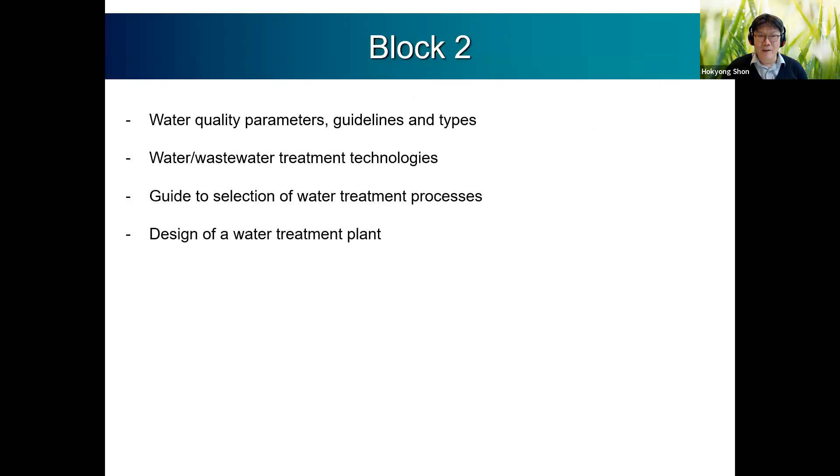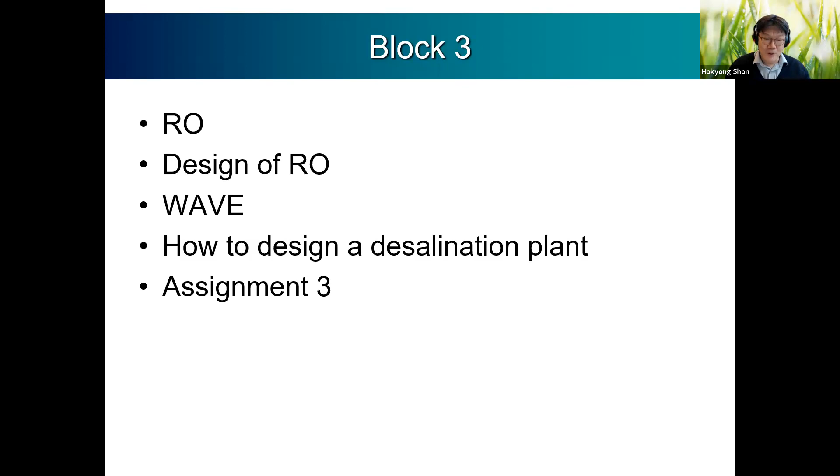So how to design your seawater desalination plant from intake, pre-treatment, reverse osmosis, and post-treatment. What's the design parameter? Also, we have used the software, the WAVE program. You are already familiar with how it can complete your design of the reverse osmosis process. So that's all about block 1, block 2 and block 3. I'm sure you are very confident to design your wastewater and seawater desalination plant, including the community engagement. That's very much necessary when you consider your plant design as well as the consultation. So that's our general information today.

Do you have any other questions on the contents of 42991 or assignment 3? We can start to discuss your questions. Any questions? Yes, Professor, I do. For the WAVE software, I'm a bit confused, because when I put in all the information and press on the report, it's still telling me there's something wrong and it cannot perform the calculations. I don't know why it's giving this error.

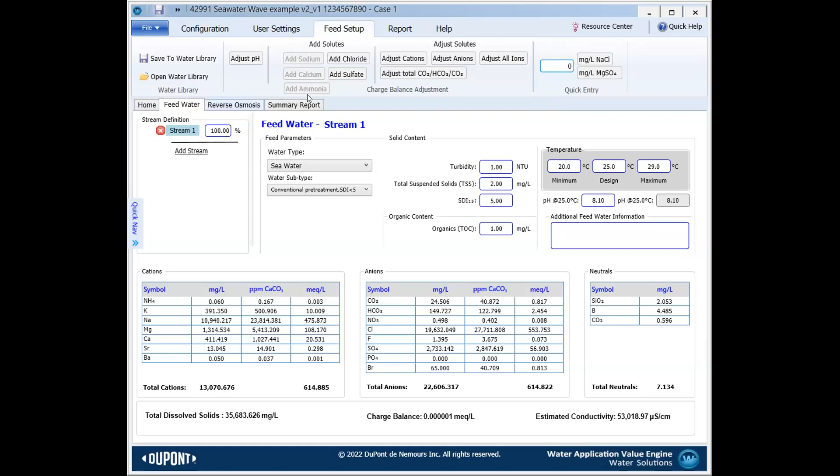All right. Can you please share your design so we can have a look together? Yes, one second, please. Can you see the screen? Yes, I can see that. Okay. This is the feed water, and this is the reverse osmosis. Okay, just a second. Can you click pass 1? Sure. 43%. 1459. All right.

Should I press the summary report? Yes, please. So this is based on your design, right? Did you utilize the example file which I gave you? Yes, modifications have been done to the file that you sent. But I also have another model I've done from scratch. This one is not giving any calculations. I have not tried getting the report for the first one.

I see. So your design has a very, very large quantity of feed water, and in your calculation of the pressure vessels and maybe your first pass, something is wrong. That's the reason why. Okay, did I give you the file last time? The seawater quality. Let me show you.

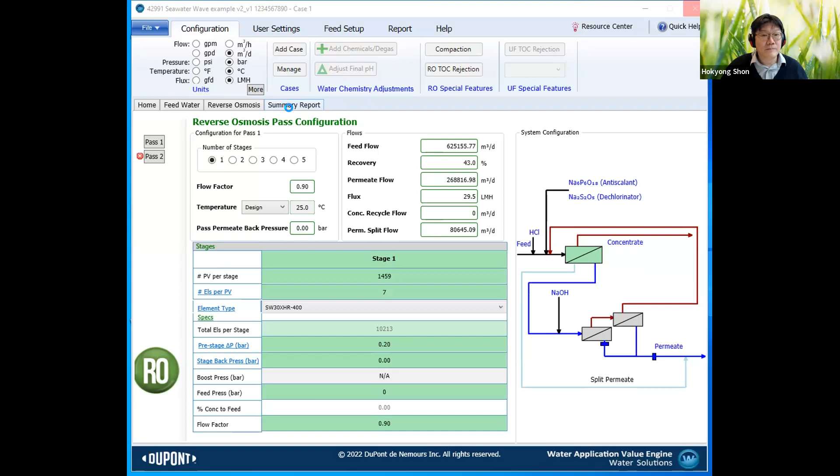Professor, can I add something? Yes, sure. So I had this same problem as Olena when I first did mine, because the feed water and the flux was running way too high for the parameters. I ended up breaking it down into smaller feed flow, like 10,000 cubic meters per day, and then having more treatment trains to allow the calculation.

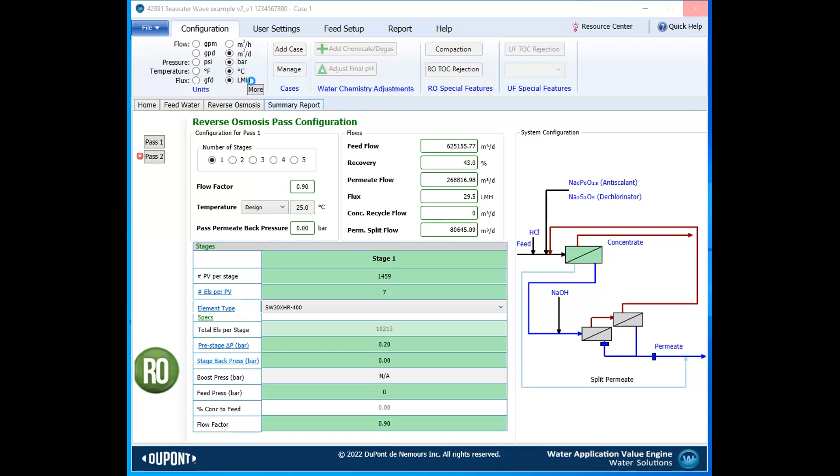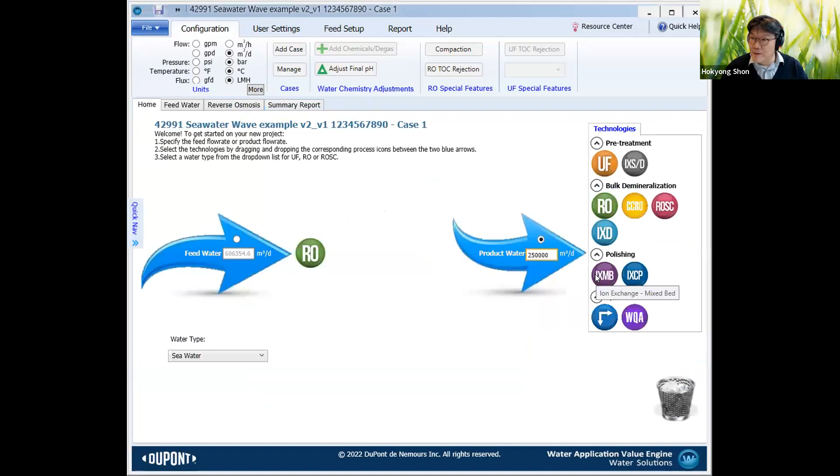Is that something you agree with? I think so. Can you show your feed water? Yeah, you failed to converge. So review your design, because your design flow rate is not good. That's the reason why it looks like something is wrong with the design factor.

And also I have a question on the pressure vessel and element calculation. I was wondering if you could give us an example, because every time I input the calculated pressure vessels from the formula, the WAVE program tells me that there's not enough elements, or the flow is too high, so I have to increase the elements to make the program work. Okay, so let's finish first.

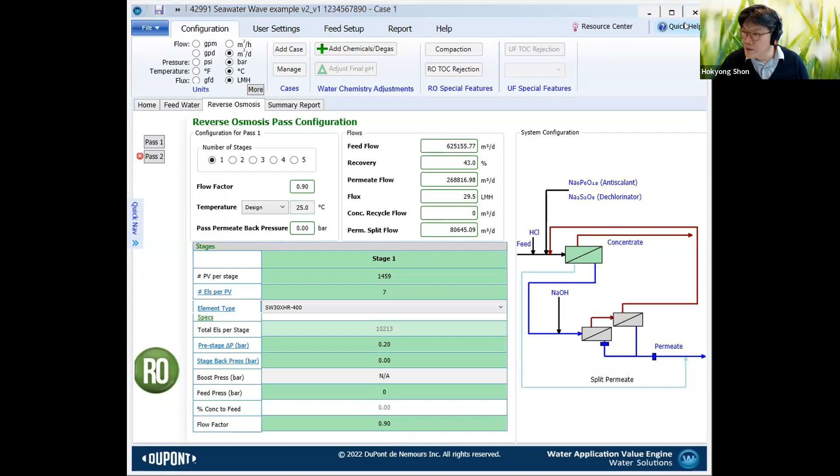First, Olena's problem. Olena, I have sent you one file through this chat box. Can you see the chat box? Let me finish the Olena one. Can you download this file? Yes, I'm doing this now. Please open your file. I think it looks a little bit different from your design. Can you open this file in your software? So what I feel, your pressure vessel is a little bit lower, as well as elements, compared to this example. So something is not flowing in yours. You can exit WAVE, yes.

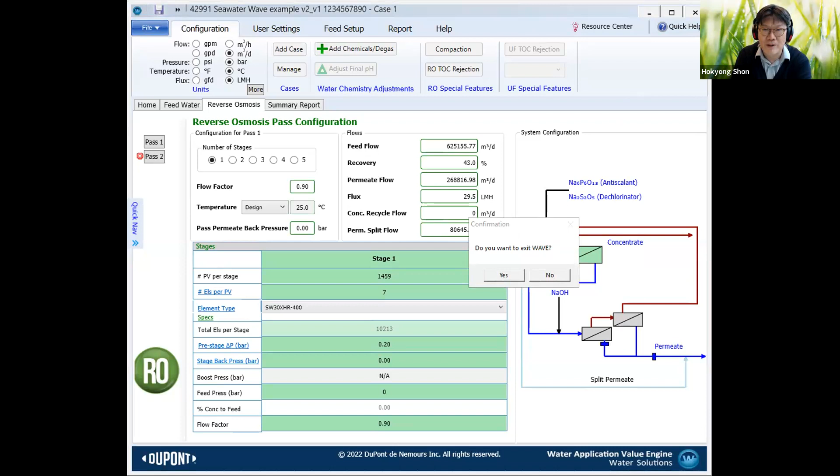Also, Professor, quick question. If the pH is 8.1, then we should add an acid to reduce the pH, right? Right, that's correct.

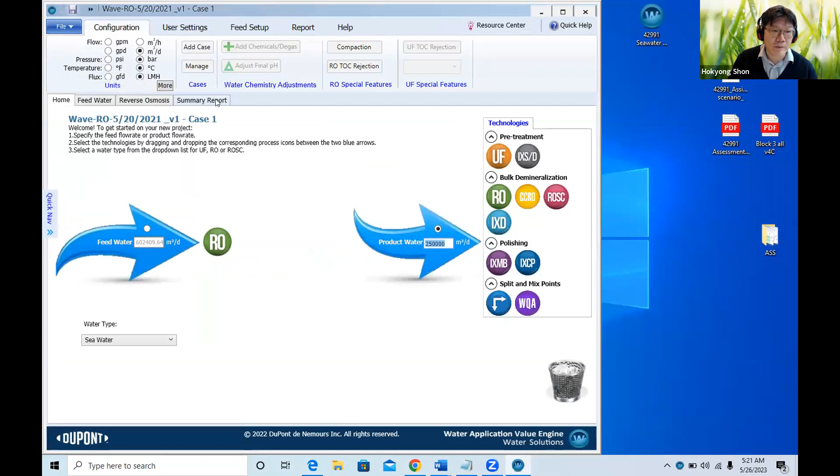So you are now opening the file, right? Yes. I don't think it's working. Can you download the file? Yes, I did. Download and then open it. It's downloaded. Can you open it? Yes, it worked. Okay, so compared to your design, can you click the summary report now? You have to wait. Can you click the summary report? Yes. So this should work.

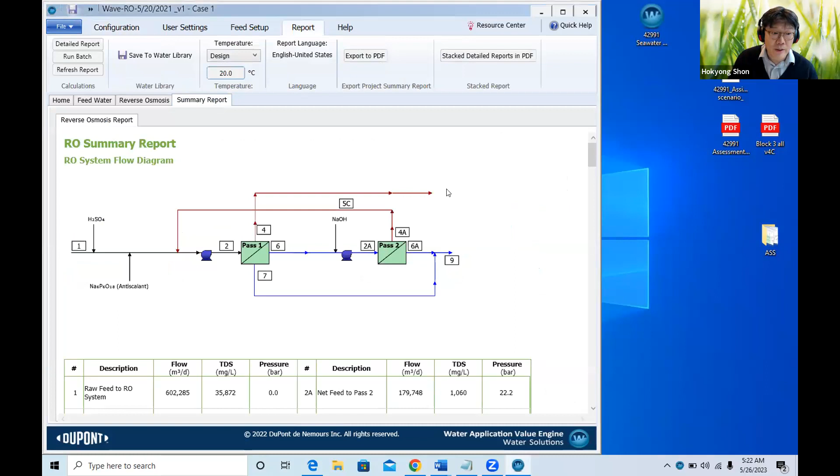And what's the difference from your design? Looks like you have fewer elements, fewer pressure vessels. Now it looks okay, right? Can you go to design warnings? Go down. Can you go up? Yes, you can see error and design warnings: none. When you have no warnings, it means this is well designed.

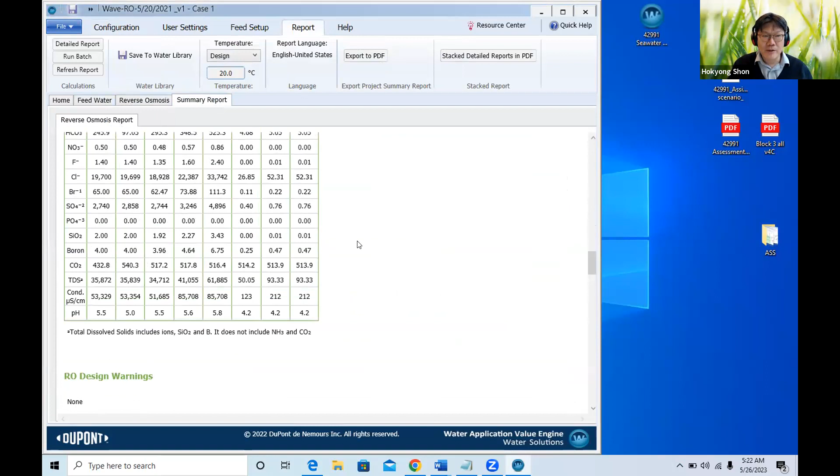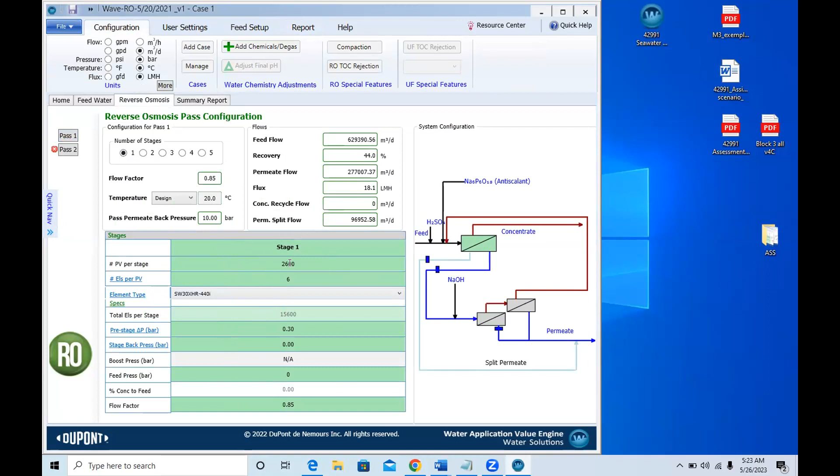Can you click reverse osmosis now? Can you go to pass one? So you can compare your pass one, pass two. It used to be 1,400 something in your pressure vessels, right? Now you have 2,600. So in fact, you designed very few pressure vessel elements, so your water flow balance is not good and this cannot be calculated in your report. You designed a very huge amount of feed water and fewer pressure vessel elements, so there are a lot of errors and you cannot get any report.

So you can start with this one. If you want to use your design, you should reduce your overall feed water. 2,600 versus 1,400, almost 2 times. You need less initial feed water to complete your design. Do you understand me? Yes. So you can make a nice summary report. The current system is working well, and this can be your starting point to design your process. And you can also see pass two. Click pass two.

So you can see the stage one, stage two. So how many pressure vessel elements do you incorporate? That's one of the most important factors. You can try to create the design warning or no design warning, because if the flow rate doesn't really balance well, you cannot see any summary report. So you can start from this report example, and then you can finalize your report assignment.

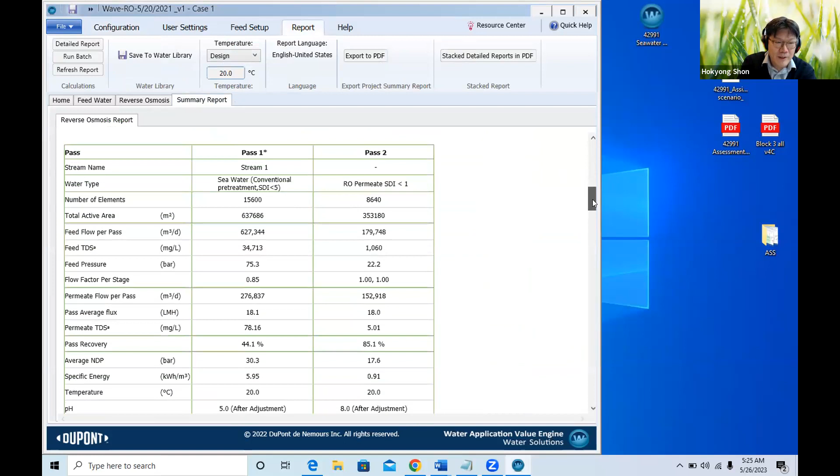Okay, Professor. And do we need to add something for pH adjustment in first pass and second pass? Okay, so it depends on your summary report. Can you go to the summary report again? Yeah. And you will see the scaling potential in your report. So you have to look carefully at your report, at what information you can get. So I can show you. Can you go down? More, more. Yes, here you can see errors, chemical adjustment.

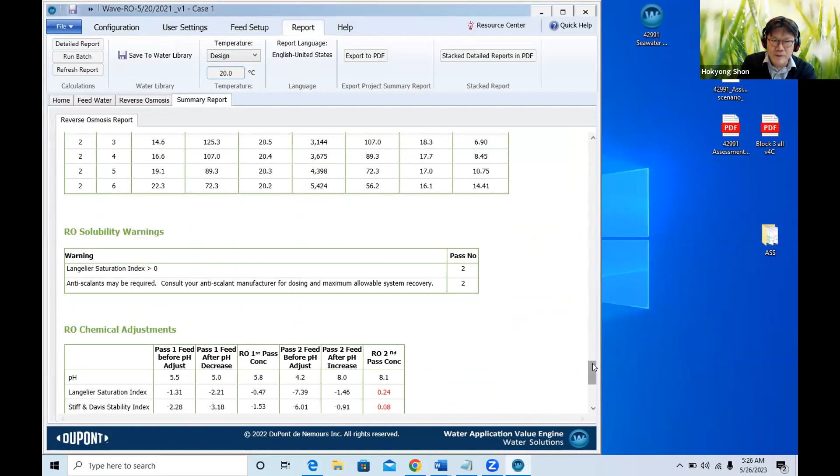So when you have a red color, it means you have warnings. If you see the error, solubility warnings, the Langelier saturation index LSI value is more than 0, which means you have a positive value, which means there is very strong inorganic scaling potential, mostly calcium carbonate or calcium phosphate sulfate. So your pass 2 will have a very strong potential. That's why it shows the warning, right? Anti-scalant may be required. Consult your anti-scalant manufacturer for dosing and maximum allowable system recovery in pass 2. So the red color shows the warning of the design for potential inorganic scaling.

So based on this information, you go back to chemical, you can reduce the pH some more, and then you can add your anti-scalant, and then you can resolve this kind of potential inorganic scaling. So you are correct. You have to put your chemical anti-scalant based on this report. So the anti-scalant also affects. Right, anti-scalant will affect your pass 2. So you can go to reverse osmosis.

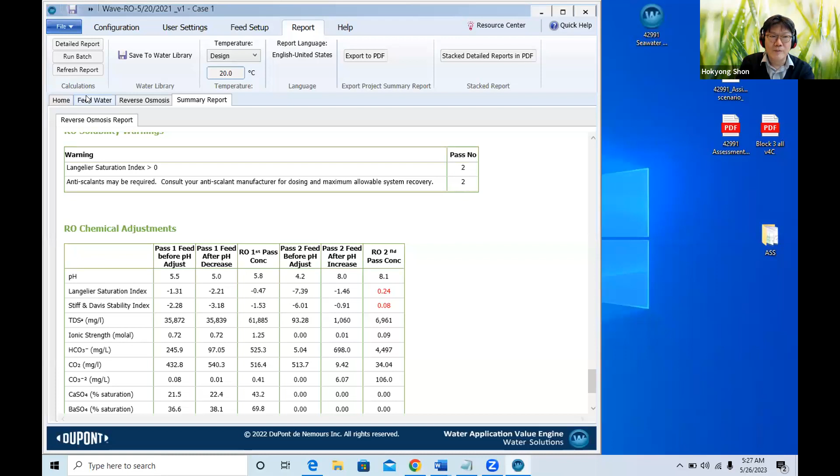So can you click the feed water? Here? No, not this one. In the tab. Feed water, RO and summary report. So this is your initial feed water. Let's say you assume that your pH is already 5.5. So from your initial feed water, the pH to the RO is 5.5. So you change your pH from your receiving feed water. And then when you operate the RO, you are concentrating into your pure water and your brine, right? So your brine is becoming higher and higher pH, which means you will get more fouling potential, right?

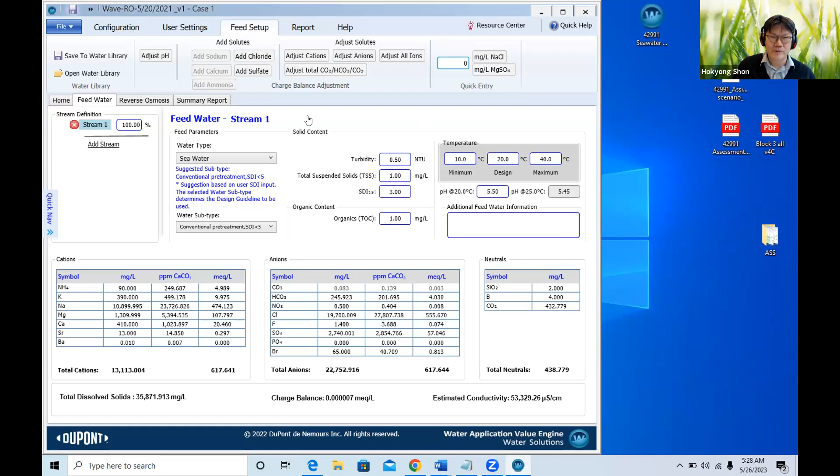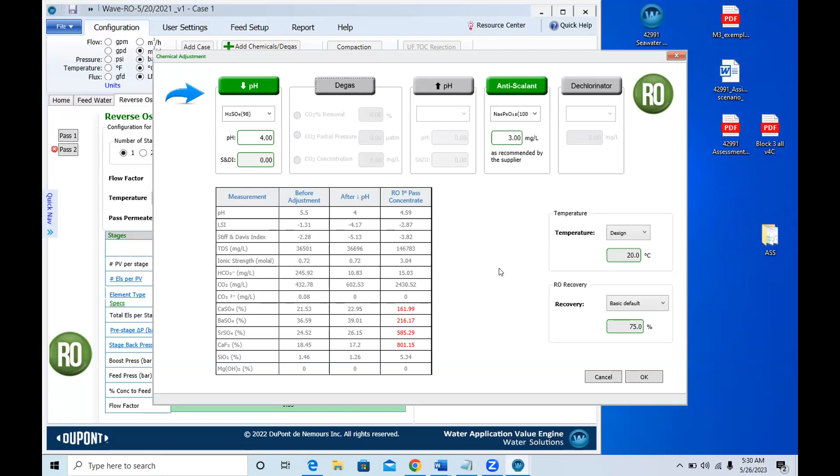So in this case, you can go to RO, reverse osmosis. Here you can click add chemical and degas. So you can decide what pH you want to adjust at pass 1 and pass 2. And then you can also put the anti-scalant here because you have some fouling potential in your concentrate, right? So depending on your design, you can put maybe 1 to 3 milligrams per liter, and then you can reduce the overall fouling potential. You can also reduce the pH more. Let's say pH 4. So you will have less inorganic scaling potential, and then you can click OK.

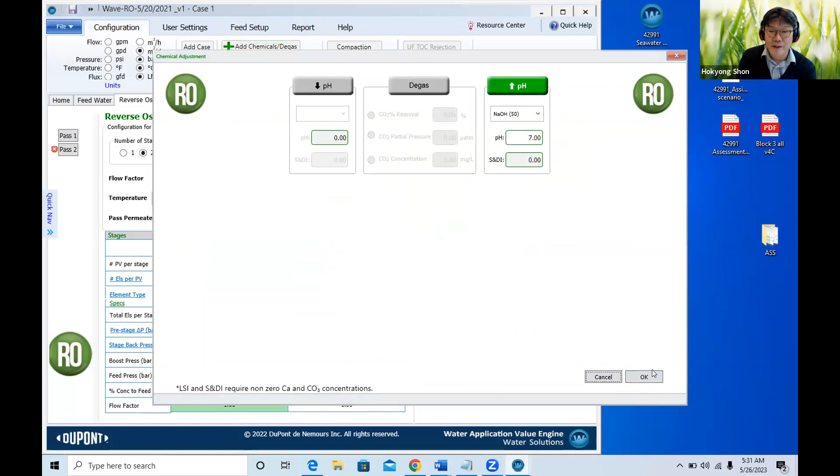Right? So based on that, you will also see the response from the anti-scalant, sulfuric acid, and feed water. So that's how you can design your overall system. Also, if you click pass 2, your pass 1 and pass 2 are different. So you can set the pH maybe 7 or 6. Let's put 6. Okay, put 7. Your range is 7 to 12, and then click it. So you will have 7, because lower pH will have less inorganic fouling potential.

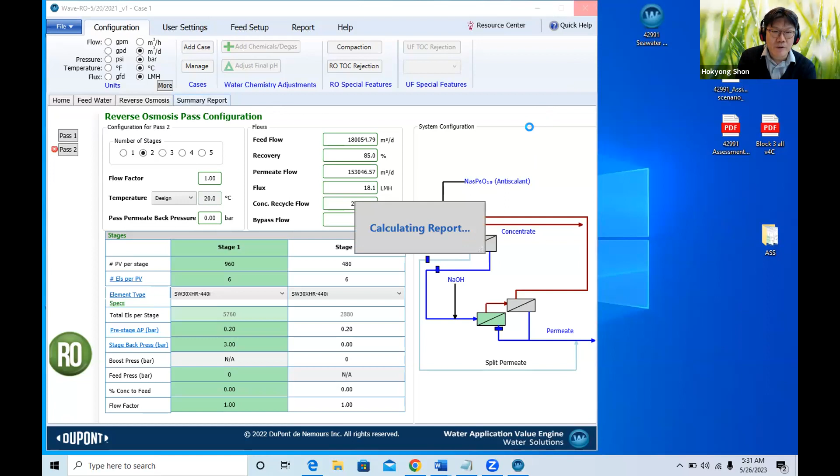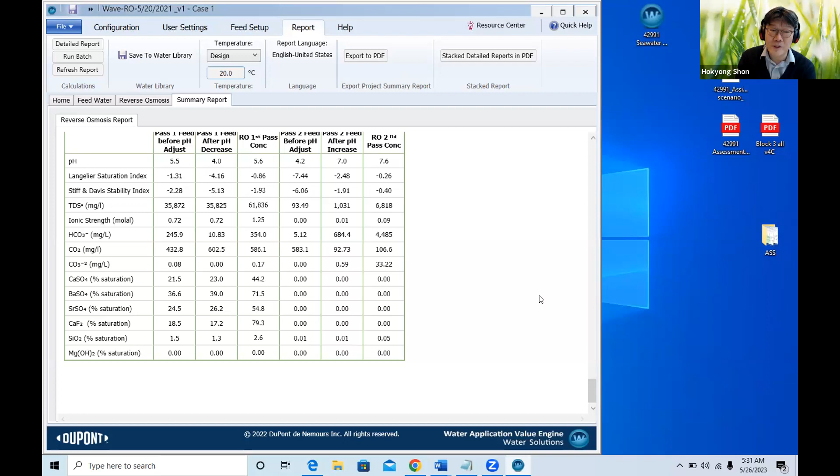Now put up the summary report again. You already adjusted your chemical, anti-scalant, and your pH. So you should have a much better summary report. So it disappeared, right? Because we changed the pH and added anti-scalant. The red color was there initially. Now it completely disappeared, which means you have designed very well for this fouling potential as well as all the water flow.

So Professor, just to make it more clear in my head, for this case, we had the pH less than 7. For assignment 3, we have the pH 8.1. So we should decrease the pH very much, because after the RO, the pH will increase again very much. So we have to decrease it again in the assignment, right?

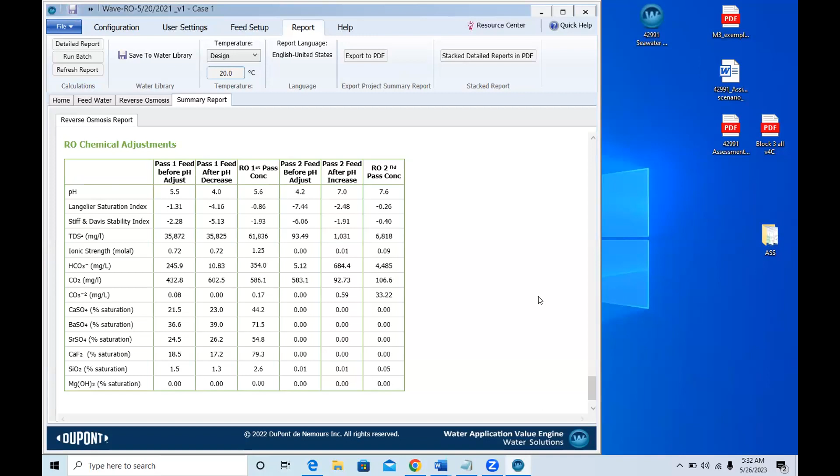Okay, in the assignment, your final pH should be around drinking water quality. So I think the neutral pH is 7. This is because the initial pH of the seawater is 8. At 8 there is very much hydroxide, and then you easily create more inorganic scaling, so we like to reduce the pH. So acidic pH is a better operating condition for your RO plant.

But after RO, for our drinking water, we like to drink neutral pH around 7, right? Yes. So we need to adjust the pH to 7 in our post-treatment for drinking water. So that's how it works. Okay. Thank you, Professor.

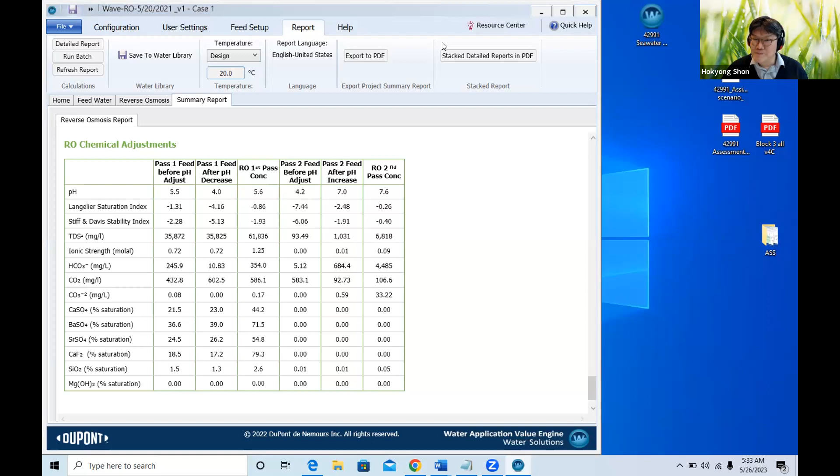Okay, next, Sing, do you have any question? That's all for me. Okay, thank you, Alina.

Sorry, Professor, I can't really share my screen because I'm on a work computer. I don't have the Wave program, but my system is working. I just wanted to double check the element calculations with you. Element calculation? Do you have an example that we can look at just so we can go through? Because every time I input my calculation, Wave tells me that I have to increase it to make the design work. Okay, let's show our class note.

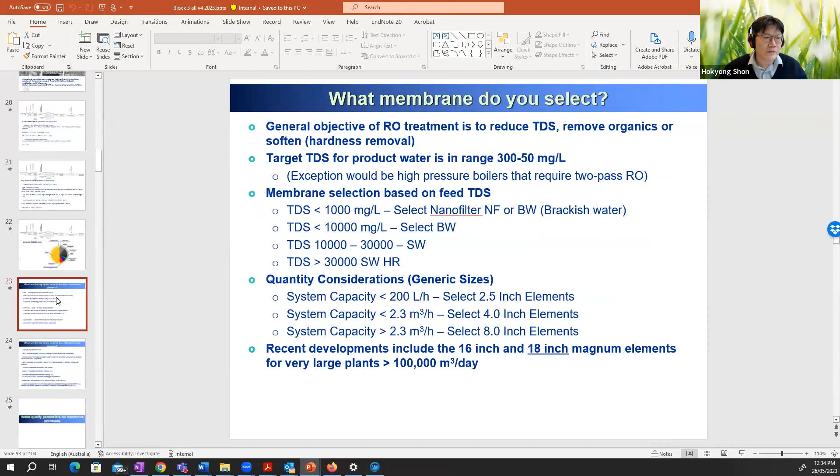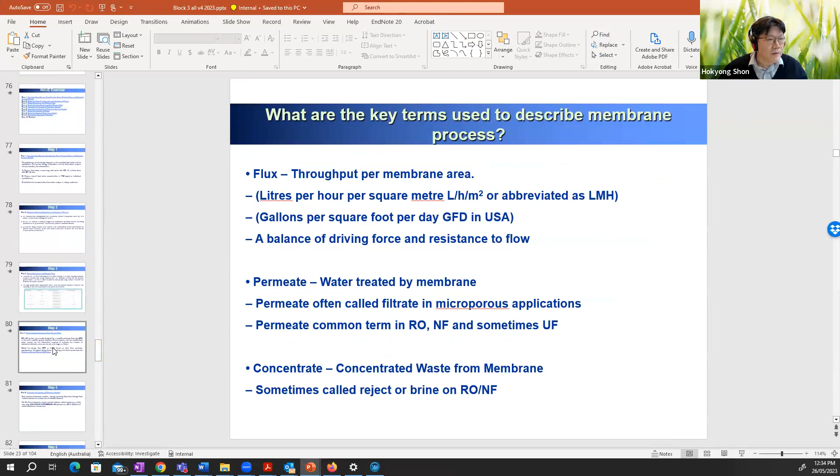Let me show you. Can you see the slide? Yep. Do you remember that we discussed the 10 steps? The 10 steps show how you calculate the elements. Okay, this is the example. Do you remember this one? Yeah, that's what I've used. So the total number of elements. So is the feed water the 720 cubic meters per day? Is the permeate flow from Wave?

That's the permeate. Your feed flow should be based on using 75% recovery, so you can divide by 0.75 and you will get almost 1,000 something cubic meters per day. Feed water, you have to decide. So let's say you have 1,000 cubic meters per day feed water; 75% recovery means 750 cubic meters per day. Am I right? Yeah. So where do you get the permeate flow? Is that the value given by Wave? No, the value is given by yourself.

In our scenario, we ask you to design a seawater desalination plant of 250,000 cubic meters per day. That's what we decide. But in the design, you don't have to design one plant only. Let's say you design 10,000 cubic meters per day, and then you can multiply by 25 design trains, and you will get 250,000 cubic meters per day.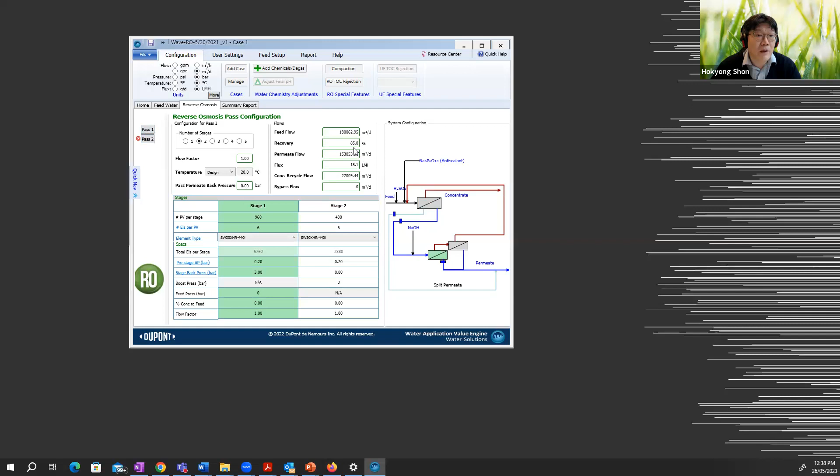So you can reduce the volume. But let me show you the example in this system. If you see here, you can put your product water in this system, 250,000 cubic meters per day. The feed water will be automatically calculated based on your recovery here, 44%, and then your pass recovery, 85%. Based on these two recovery ratios, you will get this feed water volume, your capacity.

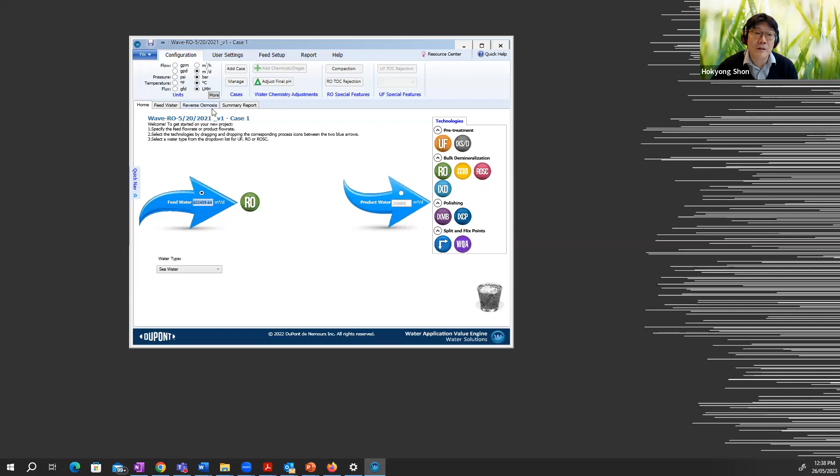Or you can put the feed water first and then give your overall recovery, and you will get a different product water value, but it can be similar. It doesn't have to be exactly 250,000 cubic meters per day. So you can decide based on feed water or product water and recovery; those are the three parameters. Yep. I've broken it down into 25 trains to reduce the power consumption as well. And I wanted to confirm the other parameters.

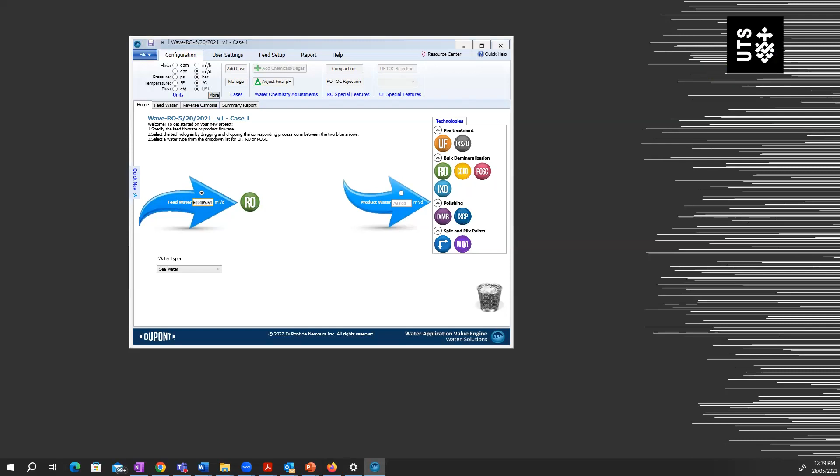The LMH flux, where do we get that from? Is it always 25 by default? This is given by the manufacturer, because some membranes have a very high flux, maybe 40 LMH, but mostly for our membranes with high salt rejection, for average flux we calculate 25 LMH. So you can calculate with 25, that's fine.

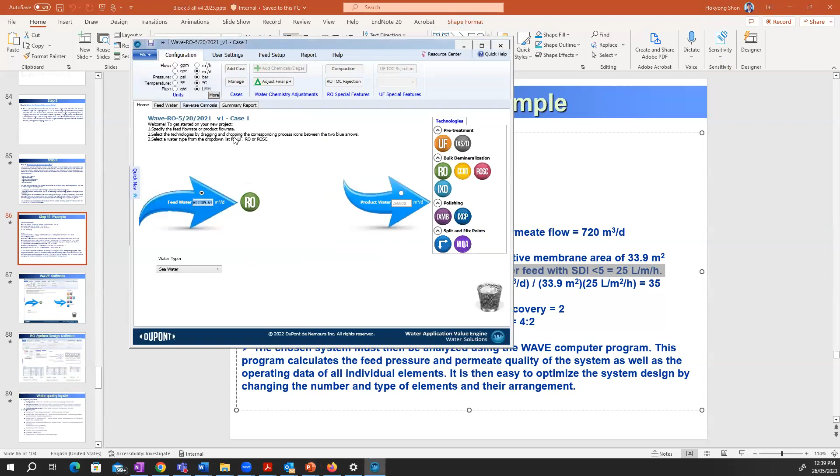I have one question there, if I can. Sorry, let me stop here. If you look at your RO software, the flux is 18 LMH because it designs automatically. This is not a given value; 25 is general information for rough calculation. When you put in your values, it automatically calculates 18 LMH, which is a very good range for average flux, so you can utilize it. Even for brackish water they have 18 LMH, so you can use the Wave value as well. It doesn't have to be fixed. Sorry, one quick question.

So I was working this morning, going through the technical data sheet from DuPont. For the membrane I'm selecting, I'm getting an LMH of 8.5. Is that weird in this context?

8.5 LMH for average flux, right? I'm trying to compare using the 400 and the 440.

For just a second, which one are you talking about? I'm using the 8-inch 400. Okay, you are using 8-inch 400, so which means this one? Is it this one? Just give me a second, taking a look at it right now.

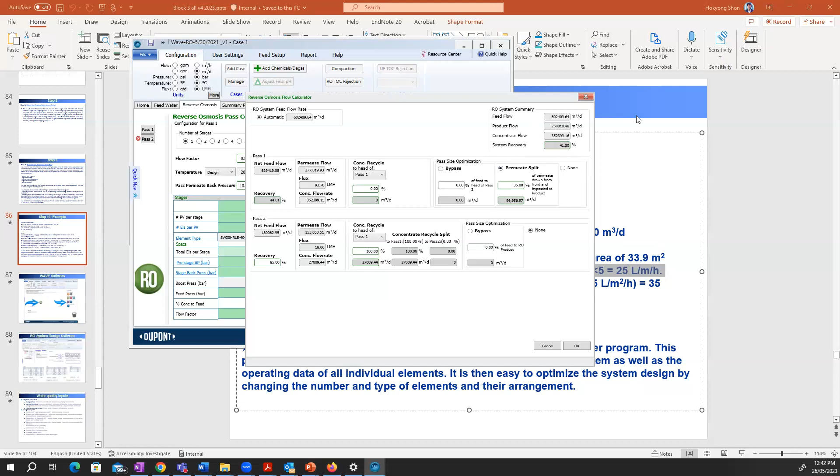For example, if we use the technical data sheet to calculate a quick approximation of how many elements we need: for the 400, it says I'm needing around 33,000 elements. And if I use 8 elements per vessel, I'm getting 4,000 vessels. My flux, taken from the technical data sheet, is 8.5 LMH.

Okay, so have you ever clicked the summary report? Do you get any error? I'm still trying to fix that, because I'm using Parallels Desktop on my Mac and it's taking a lot of power from my computer. Okay, that's fine.

Even though it's LMH, it doesn't matter, because if you have less flux, this will impact your overall water quality as well as your recovery, and some of the fouling potential, because of your very low flux compared to others. So in this case, you have to look carefully. If you have no design issue on it, that's fine.

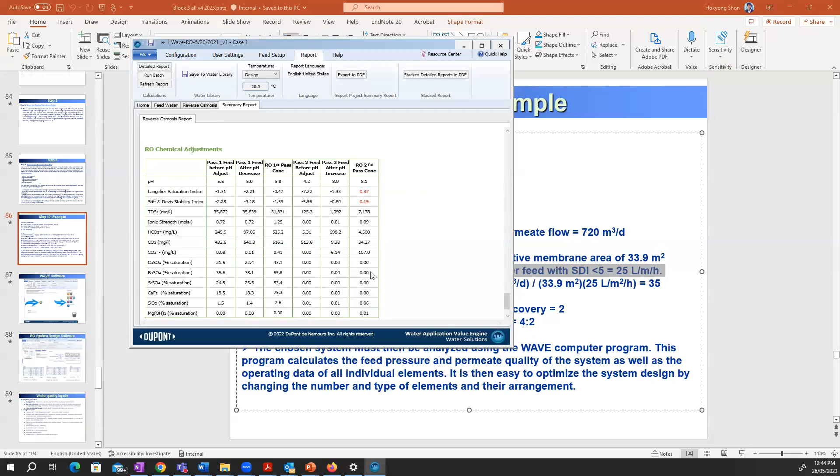But if you feel like it, check the chat box, I linked one example file. You can use this as a starting point, then compare to your result to see how this can change, and how you can make a better design.

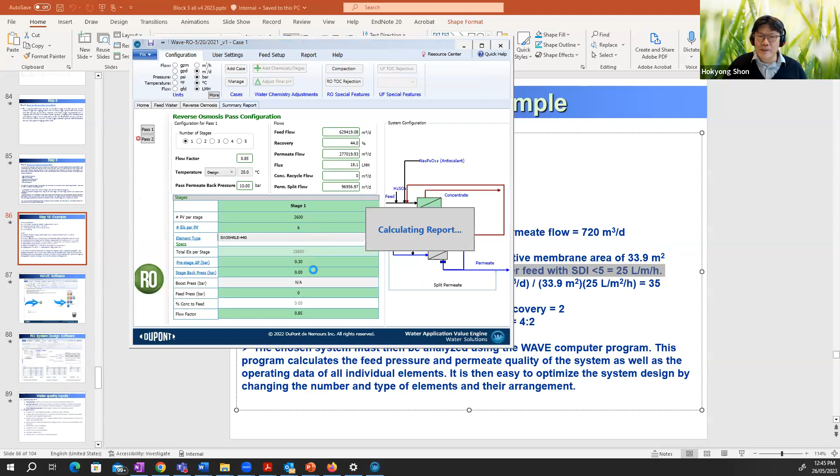Otherwise, you can follow this example and see all the different parameters, how you can change your element flux and all the different energy consumption values. That's what I want to see from your assignment.

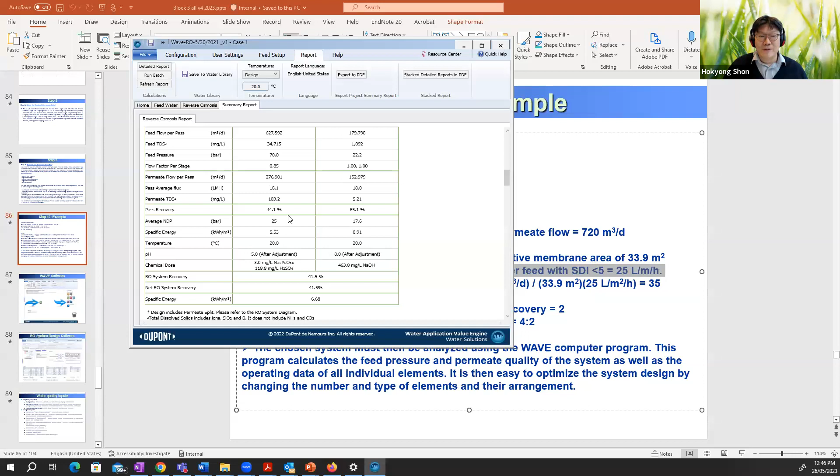Also, for the design, make sure it's as low as possible, not too many design runnings, so you can utilize your design for an almost zero fouling system.

Okay, Maria? Got it, thank you. All right, thanks. Okay, sorry, Xinghao, you can continue. Yeah, wasn't done yet.

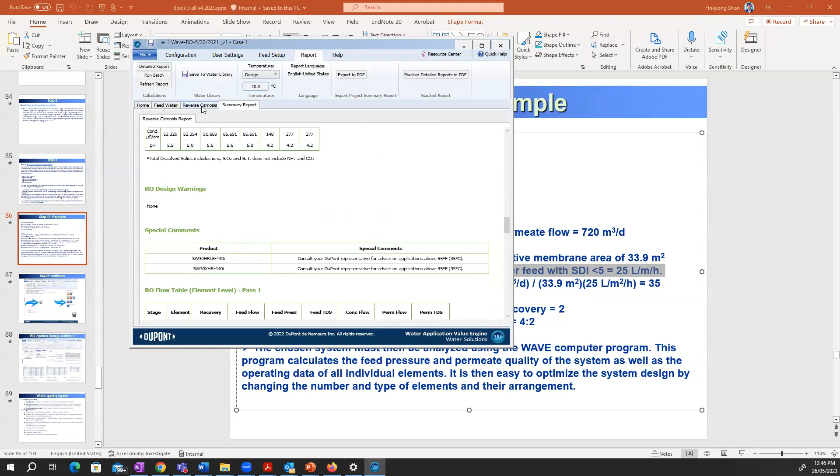Just the other parameter, the flow. Where do we get that from the manufacturer spec? You mean the flux, LMH? Not the LMH, the other one. Can you minimize the WAVE window, please?

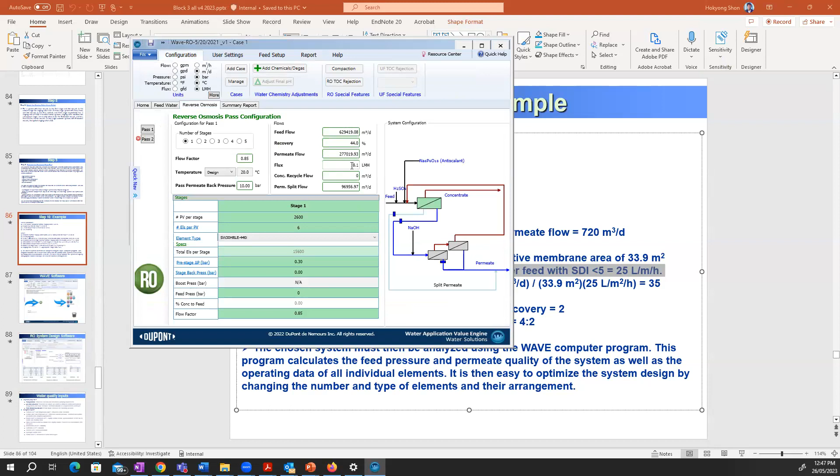Yeah, so the 41.6 cube per day value, that's one. Yeah, sorry, I just took it straight from the manufacturer sheet. Okay, I think that's the conversion.

This is a unique conversion - we have LMH and we want to utilize a conversion matching cubic meter per day. So from LMH we convert to cubic meter per day, you remove all of them and finally you get the 35. In the manufacturer spec, it's given in meters cube per day.

Which manufacturer? I mean the 41.6 cube per day. Okay, that's taken from the membrane specification, correct? You are right, this is from here. 20 LMH, 25 LMH. It's a unique conversion.

So LMH, you want to convert to cubic meter per day. So you need the 41 LMH will be equivalent to cubic meter per day. Do you understand? Because 1 cubic meter is 1,000 liters, and 1 day is 24 hours. That's the reason why you get 41.67.

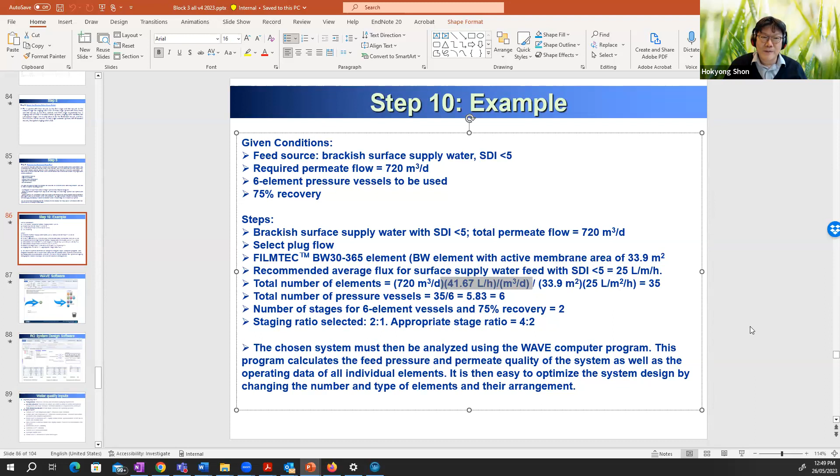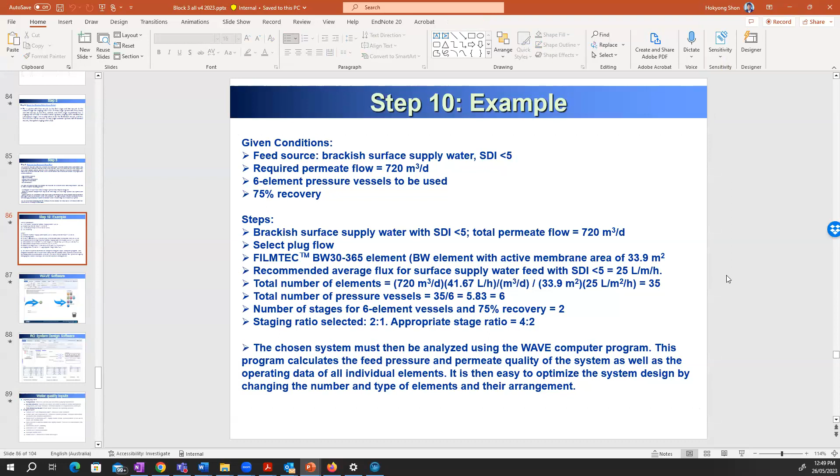Okay, anything else? How about other students? No more questions? I was just asking about the plant shutdown and operation section.

I remember emailing you about that. I couldn't really find anything, I'm just not sure how to make the layout for that one because I've never really seen a plant shutdown and restart plan before.

Okay, because the reason we have to shut down is that the desalination plant is a very expensive, energy intensive process. So when we have a lot of dam water, like when Warragamba Dam is full, we don't have to operate the desalination plant, which saves a lot of energy, so we can stop. When you have very heavy rainfall and the dam level is full, we shut down. This is not common practice, it's a very special practice, but when you have a drought and the dam level decreases to almost 50%, less than 50%...

So in this case, we start our plant operation again. For this question, you don't have to mention how you shut down the process or how you restart it. What I am asking is how much the dam level rises, and at what point the desalination plant has to be shut down, and then when the dam level decreases, how you can reoperate your process. So the restarting plan depends on the dam level.